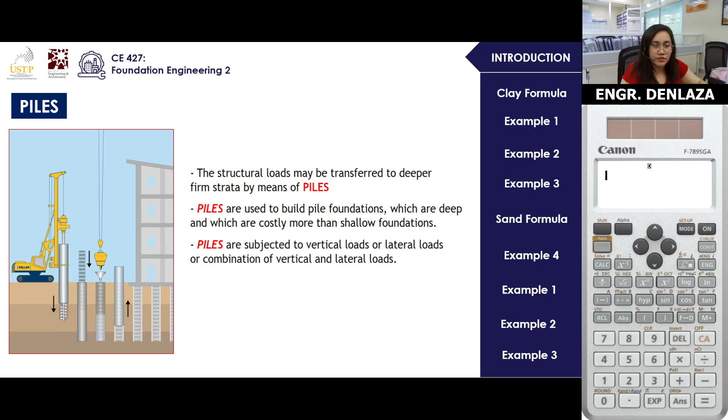Let's continue. Piles are used, piles are subjected to vertical loads, or it could be lateral loads, or a combination of these. What else?

There are different classifications of piles. Our most common, and what we've been solving in the past few months, is concrete. That's our assumption, that it's concrete. But actually, there are several types of piles. Aside from concrete, you also have steel, timber, H-flange or I-flange, then precast, and then composite.

Composite is the composition of concrete as well as the I-flange or H-flange. But realistically, timber is no longer applicable, it just goes straight into the ground. As for the I-flange or H-flange, it's somewhat costly, it's not economical, as well as the steel pipe. But who knows.

Here are the importance of piles. When one or more upper soil layers are highly compressible, meaning it's clay, and too weak to support the load transmitted by the superstructure, meaning buildings, etc. Piles are used to transmit the load to underlying bedrock or stronger soil layer. This means that if you have this natural ground line, NGL, and then you have a huge building, typically the piles go down through each layer.

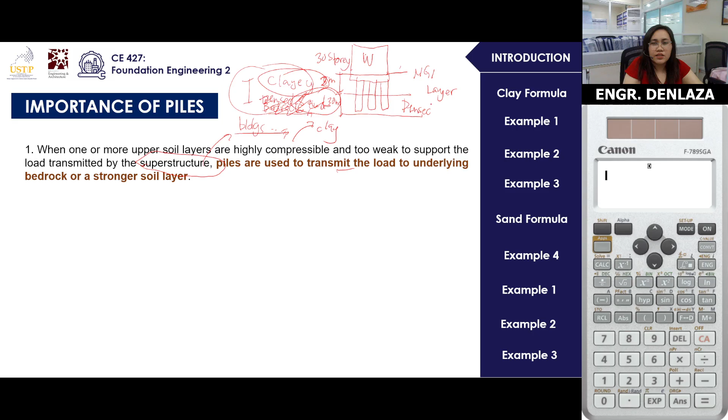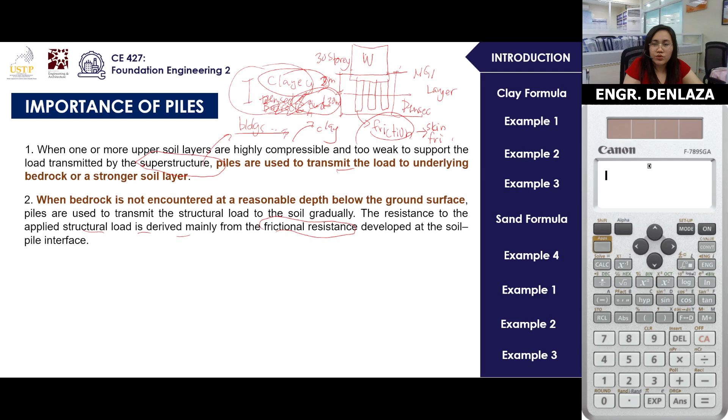So this friction that I'm talking about is called skin friction, in this case.

When subjected to horizontal load, pile foundations resist by bending while still supporting the vertical load transmitted by the superstructure. This type of situation is generally encountered in the design and construction of earth-retaining structures and foundations of tall structures that are subjected to high winds or to earthquake forces.

So it depends, it may be a lateral load. For example of lateral loads, we have earthquake load, and we also have wind load. So piles help counter or manage these types of loads, not just the gravity loads that we know. There are examples of gravity loads like dead load and live load - these are called gravity loads. And these two are some of the few examples of lateral loads.

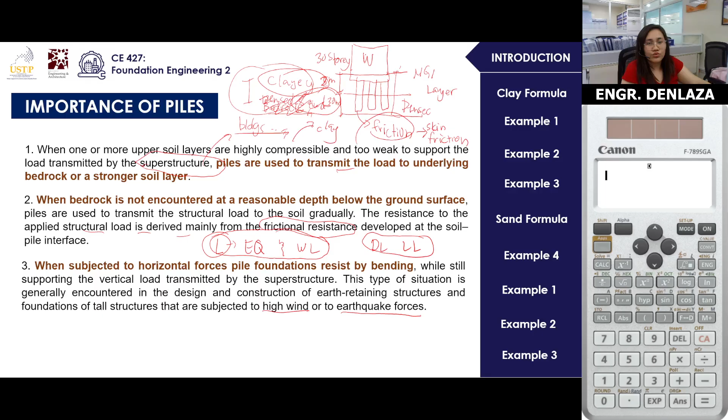In many cases, expansive and collapsible soils may be present at the site of a proposed structure. This soil may extend to a great depth below the ground surface. Expansive soils swell and shrink as their moisture content increases.

So that means to say that, of course, there is water. So what's the effect of water to soil? Of course, it will shrink, it will settle.

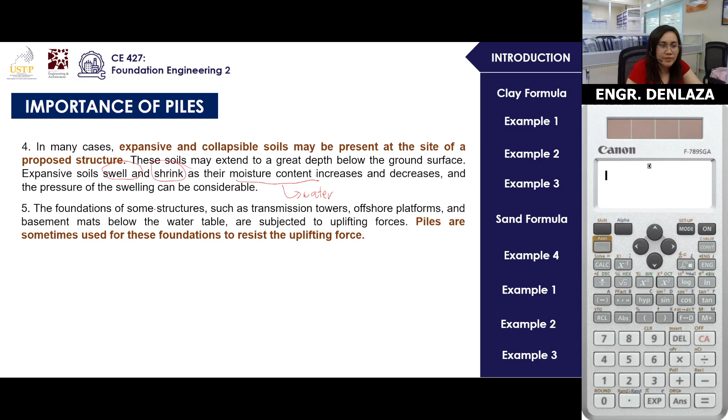Foundations of some structures such as transmission towers, offshore platforms, and basement mats below the water table are subjected to uplifting forces, and piles are sometimes used for this foundation to resist the uplifting force. Okay, that's it.

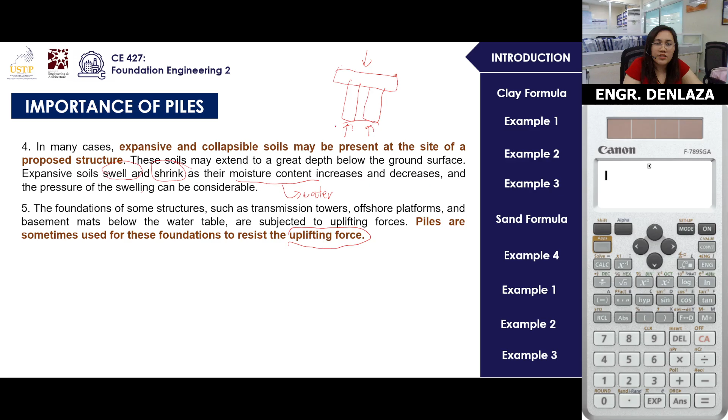Then pile becomes footing. So technically, if you are exerting a huge load downward, to stabilize it, something must counter that. And these forces that counter it are called uplift force. So depending on the question, sometimes uplift force is what's being asked.

Bridge abutments and piers are usually constructed over pile foundations to avoid loss of bearing capacity that a shallow foundation might suffer because of soil erosion at the ground surface.

So typically for a bridge, when you construct a bridge, especially when designing, you are not only designing the bridge itself - there's the girder, the slab, and the pavement. But typically there's a support here, and these supports are what you call abutments and piers, along with wing walls.

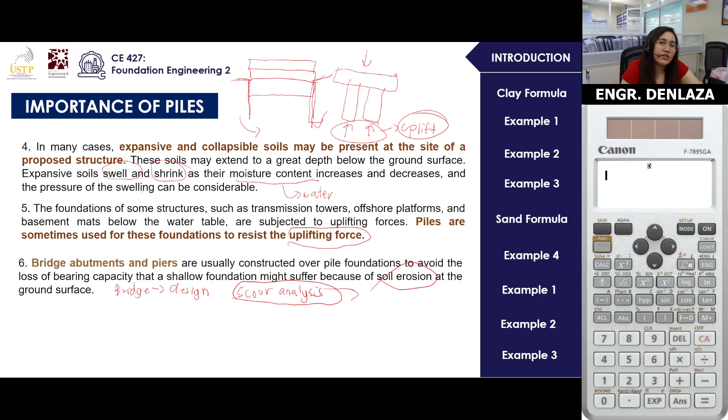And these supports alone are analyzed through what's called scour analysis. In scour analysis, you look at the long-term effect or what would happen in the later years in terms of soil erosion and other factors, especially regarding water. So along the years, it's analyzed not just for the design of the structural member itself, but also for the long-term effects.

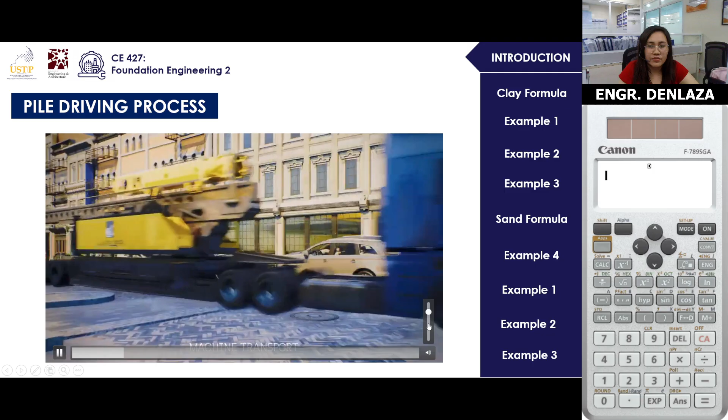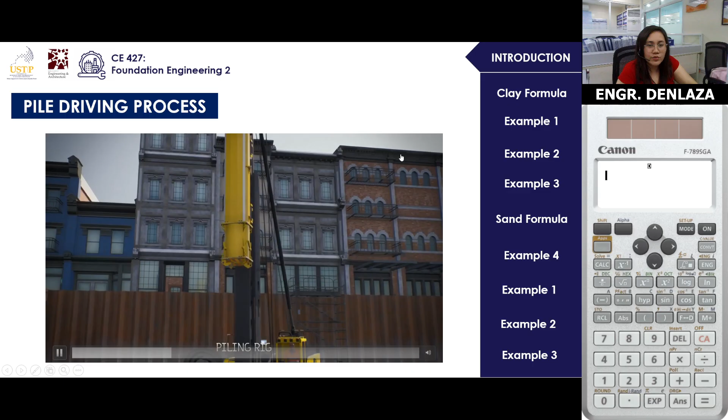That's called a pile driver. During my OJT, I was able to experience pile driving. I experienced pile driving, and I think it was a bridge project, so that's why piles were used there.

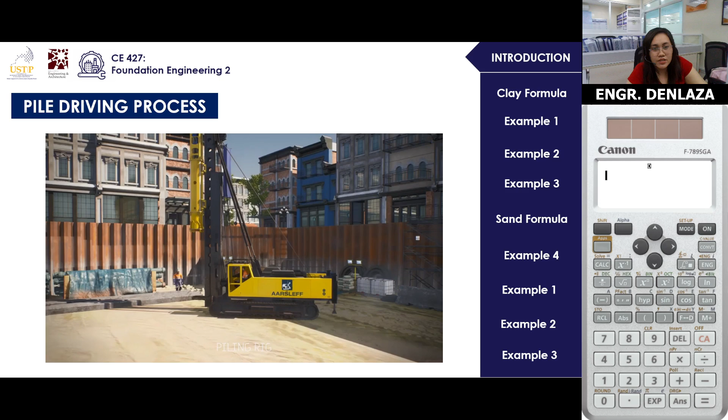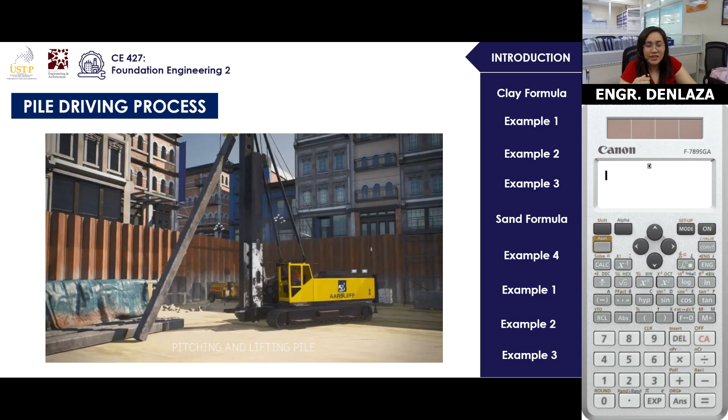So that's pile driving. Actually in your board exam, piles are not just taken lightly - don't be confused about where the pile driver's hook is placed.

Instead of using traditional rebar, the reinforcement used in piles is called tendons. Tendons are actually steel rebars, but in the sense that they are twisted, like spaghetti that's been twisted like paper, and turned. That's the shape, and tendons are used in piles for pre-stressing.

What is the purpose of pre-stressing, ma'am? The purpose of pre-stressed concrete, if this is your pile, this has reinforcements, and those reinforcements are called tendons. If you place it like that, the purpose of pre-stressing is to give it an expectancy for cambering.

What does cambering mean, ma'am? So in a structure, let me draw it again. We expect that there will be a downward force when we apply a load there. Of course, as a flexural member, what will happen? Of course it will go downward, right? It will go like that.

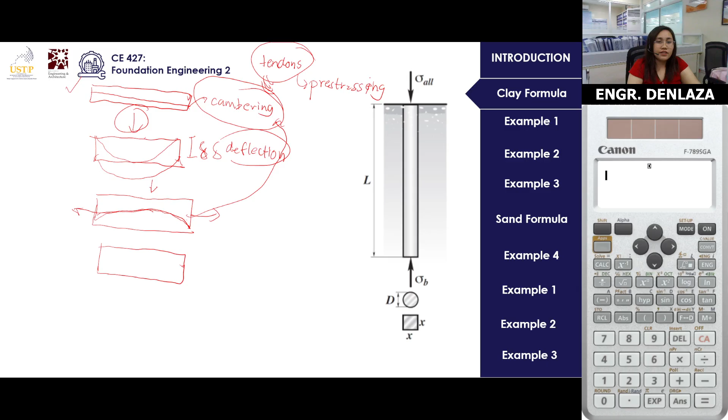I hope you appreciate the purpose of pre-stressed piles, because you will definitely encounter that, probably some of you will encounter that in your OJT. Okay? So, welcome to Piles on Clay.

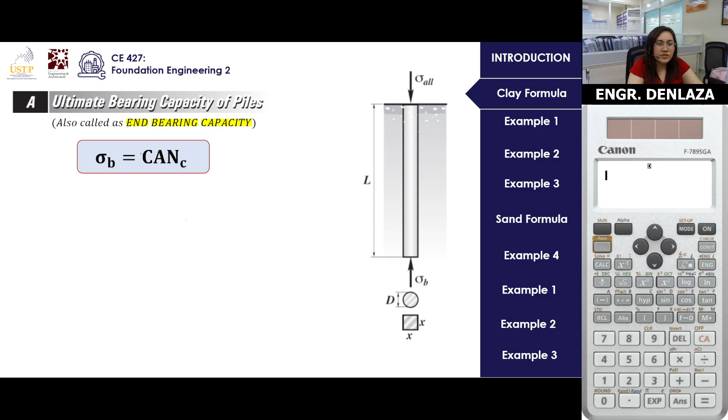So I'm talking now about piles on clay. Ultimate bearing capacity of piles could also be called end bearing capacity, and it has this formula: stress B is equal to C, which is cohesion, times area, times NC. NC is the bearing capacity factor. I'll just call it QB, in case I'm wrong, but QB, it's easier. Stress B, same thing.

So QB, and then cohesion. Cohesion, of course, you know that it's one half of your unconfined compressive strength. You know that already. Then area is the cross-sectional area of the pile tip. So if your pile is circular, what's the area of a circle? Then if your pile is square, just use the formula for square area.

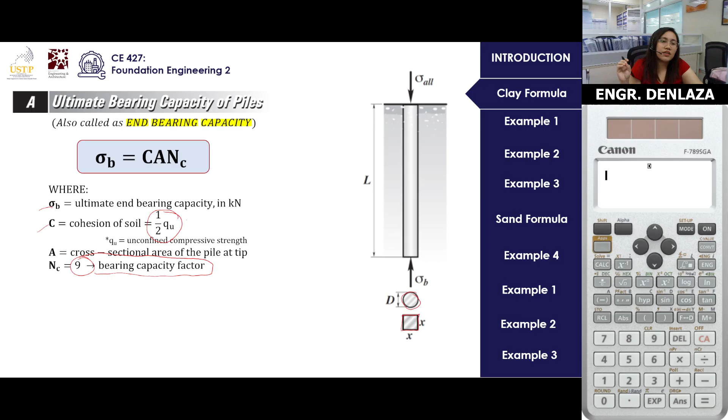Then NC is the bearing capacity factor. By the way, if it's not given, automatically use 9. The explanation for this is the assumption used and empirical tests, after several tests, 9 came out as the conclusion, to be safe. Okay?

Next formula is the ultimate frictional capacity. As mentioned earlier, piles in sand are called friction piles. This is also called skin friction, and it has the mnemonic CLAP: cohesion, length of pile, adhesion factor (alpha), and perimeter.

So what are these variables? Cohesion is still cohesion, this is alpha, actually there's also a beta, but I didn't introduce that because it's not commonly used outside the board exam. So C is still cohesion, L is the length of the pile, and alpha is your adhesion factor or frictional constant, and P is perimeter.

Going back, you might get confused about area versus perimeter. Area is different from perimeter. For a circle, what's the area? Pi, in terms of diameter, that's pi over 4 d squared. Perimeter of a circle is pi d. Area of a square is just x squared, and perimeter of a square is 4x. So you might get confused between area and perimeter.

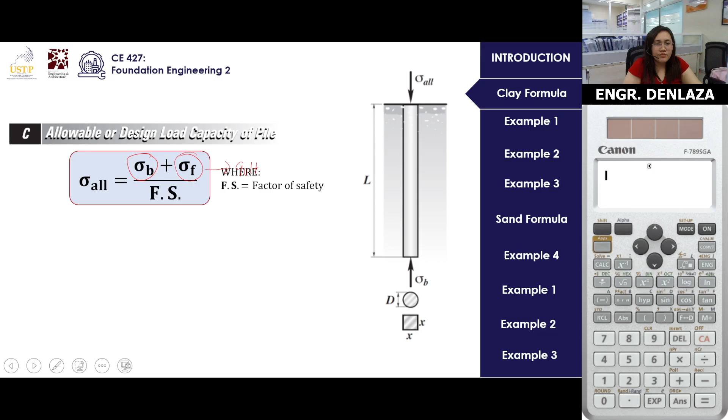Okay, now let's go to example number 1. This formula is easy to remember. The bearing formula is CANC, and the frictional one is CLAP. The ultimate, then allowable, is just QB plus QF over Fs. Now let's evaluate the resisting capacity against axial load in kN due to skin friction.

So what is the skin friction, QF, of a round wooden pile? This is a circular pile embedded into a layer of plastic clay given the following conditions. You need to determine if it's circular or not based on the given size, unless it's specifically asked about. The size of the pile is 0.35 m average diameter.

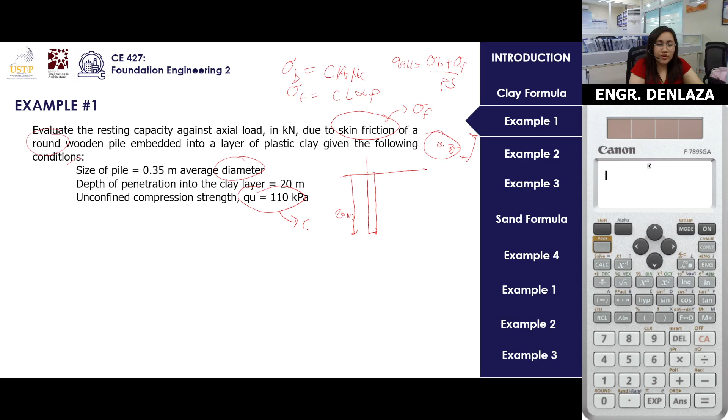So the diameter means it's circular, that's 0.35. The depth of penetration - if this is the soil, it's embedded 20 m into it. And the unconfined compression strength is QU. We don't directly get the cohesion value; you know that cohesion is half of the unconfined compression strength. So just divide by 2, you get 55.

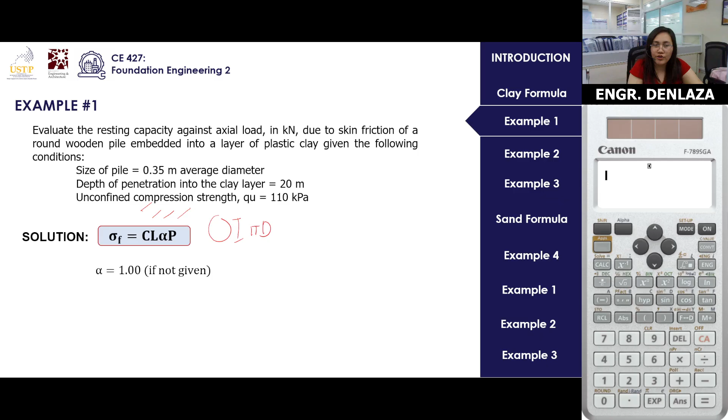Solution: So that's the equation, CLAP - this is the cohesion, the length, the adhesion factor or skin resistance factor, and the perimeter. Perimeter of a circle is pi d. If the adhesion factor is not given, it's always assumed as 1. So if you don't see a value for the adhesion factor, just use 1.

So this is d, 0.35 is the diameter of your pile. Cohesion is half of 110, so that's 55. And the length is stated here, it's 20 m. Plug it in: 55 for C, L is 20 meters, adhesion factor is 1, and P perimeter is pi times 0.35, and you will get 1209.51 kilonewton. Okay, so that's simple.

Example number 2, this one's even easier. What is the design capacity of the square pile 0.3 by 0.3 if it has a skin friction of 660? So technically QF is given, which is 660. Take note of that. The pile size is square, 0.3 by 0.3. It has a cohesion of 90 kPa, assume a bearing capacity factor NC, and a factor of safety of 2. What's being asked is the design capacity.

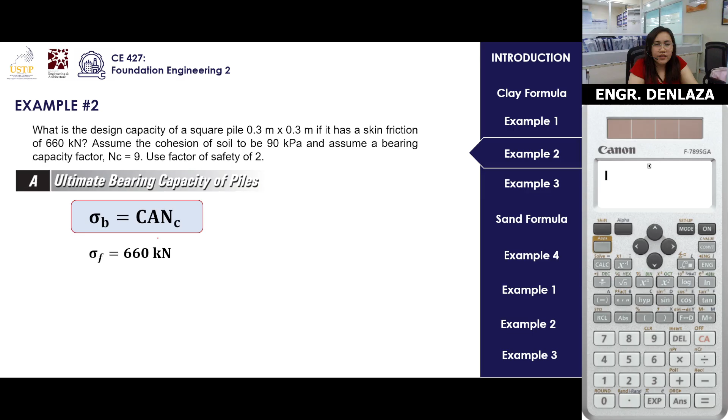So that's probably Q allowable, the ultimate bearing capacity of piles, right? You know it's CANC formula, and you have the given 660 as your skin frictional value. Allowable design load is the sum of your bearing and frictional capacity. After that, you know the collective term for that is ultimate, and dividing that by the factor of safety gives you the design capacity.

So QB equals CANC: cohesion is 90, area of a square is 0.3 squared, and NC is simply 9 since it's given - but if it's not given, just use 9. That gives 72.9 kN. Now since you have QB and QF, and the factor of safety given, 72.9 plus 660 all over 2 gives you 366.45.

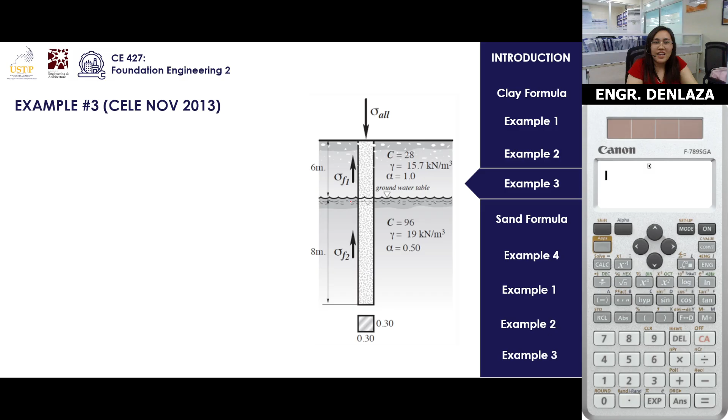A problem states there's a 0.3 square pre-stressed concrete pile. You'll notice it is embedded in a soil where there's a water table. The depth from the ground surface to the water table is 6 m, and afterward there's another 8 m, giving a total penetration of 14 m.

What is the total skin friction? That's QF. And then total end bearing, that's QB. And then design capacity is QF plus QB over FS.

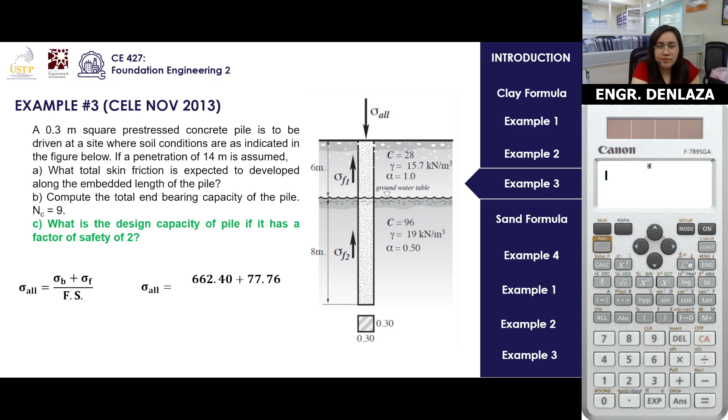After that, the last question is: what is the design capacity of the pile? If it has a factor of safety of 2, you just add what you got earlier. So that's 662.40 plus 77.76. You will be getting 370.08.

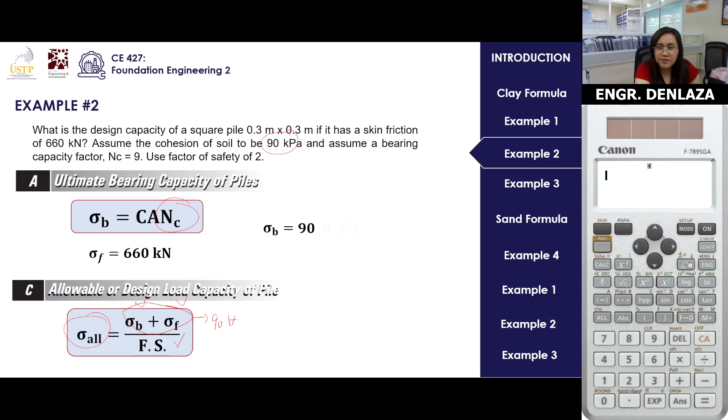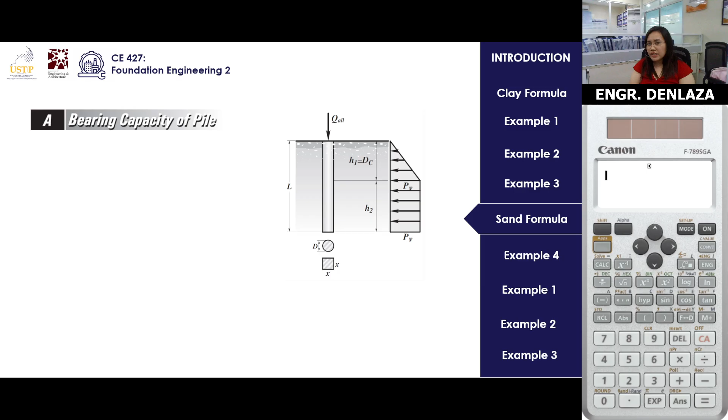Bearing capacity of pile. So this is the pressure diagram. The concept about sand is that there is a presence at your height 1, which is called the DC or the critical distance.

The critical distance will be calculated depending on the type of sand being assessed. It could be loose sand or dense sand, so the multiplier is different depending on the case. After getting the critical distance, you will get the pressure, that's PV, the pressure diagram, and it is just gamma H, so PV equals gamma DC.

So you know pressure is just gamma times height, because DC or the critical distance is still a height or a distance. If you notice, the entire pressure diagram for our pile, especially when analyzing piles on sand, is trapezoidal.

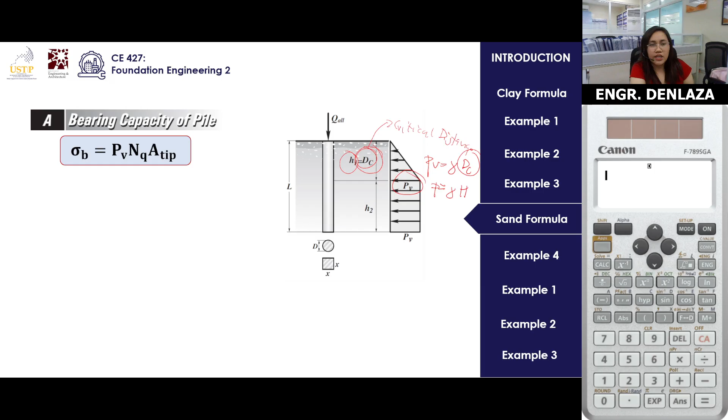It has this bearing capacity formula: QB equals PV NQ area at the tip. PV is the pressure diagram, QB is the ultimate bearing capacity, and pressure equals gamma H, where in this case that's the critical distance DC, or critical depth - it doesn't matter which term. NQ is the soil bearing capacity factor, A tip is the cross-sectional area at the tip, and DC is the critical depth.

Important conditions for DC: if it's dense compact sand, you use this equation - your DC is obtained by multiplying 20 times the diameter of your pile. So if the diameter is 0.3, that's 20 times 0.3 for dense compact sand. But if it's the opposite, loose sand, then DC equals 10 times the diameter of the pile. So the only difference between the two is the multiplier.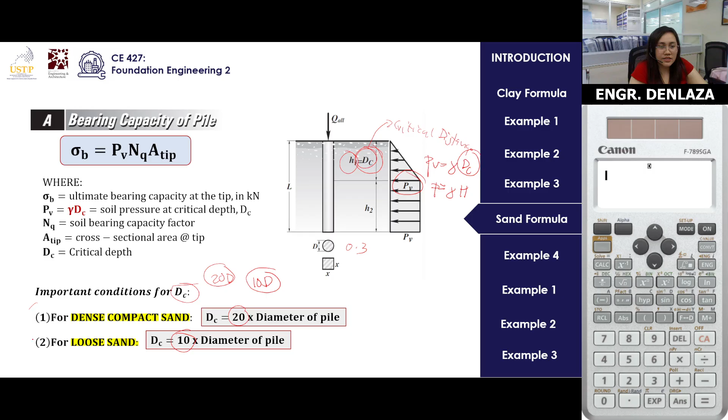So ma'am, where do 20D and 10D come from? These are results of empirical research - long laboratory research that determined how to get the critical depth for dense and loose sand, which is 20D and 10D respectively.

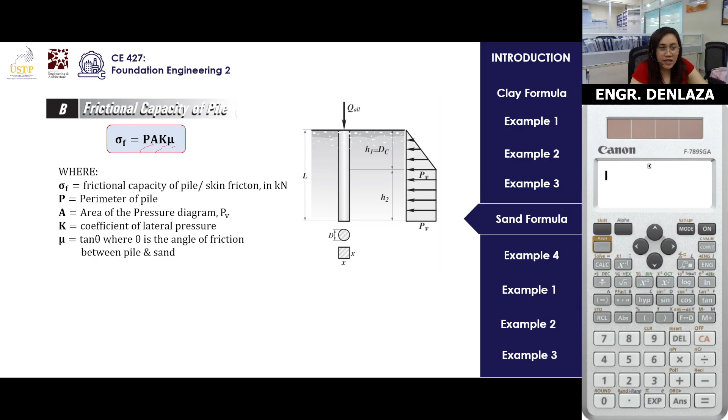Now let's derive the equation for frictional capacity of pile. There's a mnemonic for this: PAK mu. That's Perimeter, Area, K constant, and mu. So QF is the frictional capacity, P is the perimeter, Area is the area of your pressure diagram - if it's a trapezoid, use the area of a trapezoid. K is the coefficient of lateral pressure, and mu can be obtained using the equation tan theta, wherein theta is the angle of friction between pile and sand.

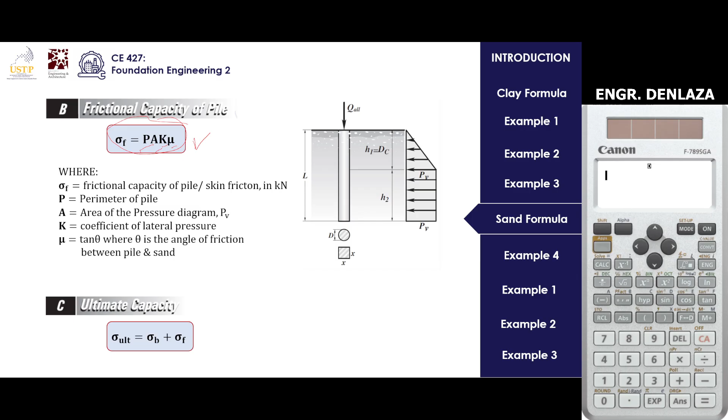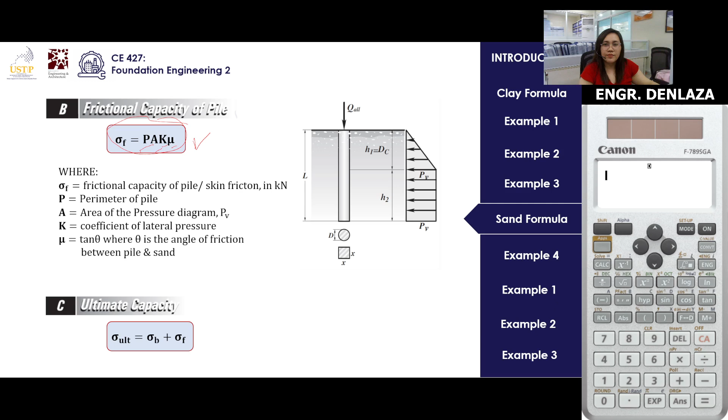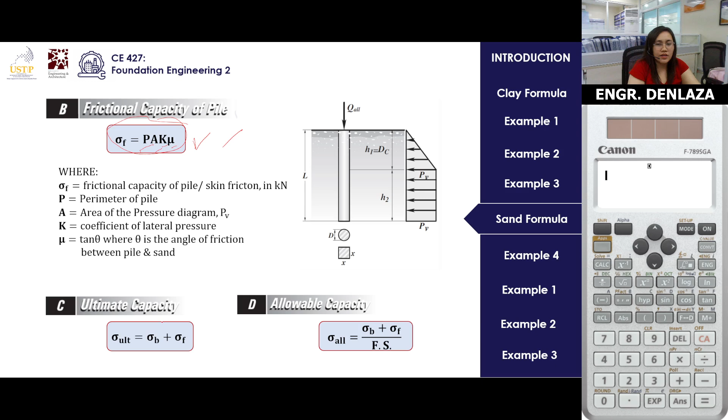Okay, so going back - that's the frictional capacity of piles, PA, K, and mu. And ultimate capacity is simply QB plus QF - that's the collective term for the sum of the bearing and frictional capacity, it's ultimate. And allowable capacity is just Q ultimate divided by the factor of safety.

Example number 4. I want to stop sharing because there's lag, my monitor and OBS are very laggy. I hope it's better now.

For example number 4: a concrete pile having a diameter of 0.3 is being driven into a loose sand - that's 10D - having a unit weight of 20, and length of embedment of pile is 12 meters. Capacity factor NQ. Calculate the ultimate capacity, which is simply QB plus QF. Simple lang.

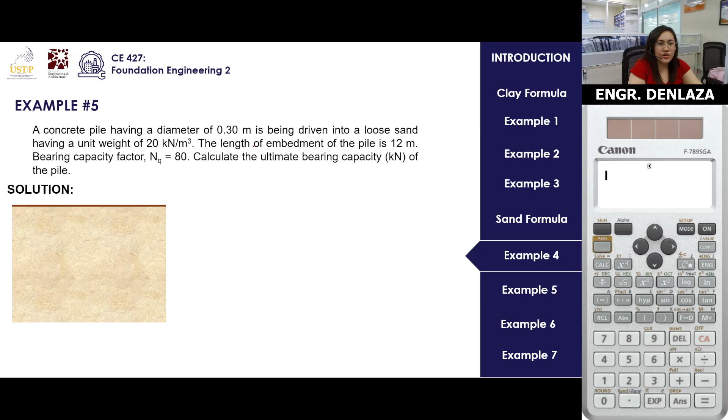Solution: so if this is your soil profile, and you have your pile embedded 12 meters - so that's 12 meters - and since it's a circular pile, it has a diameter of 0.3.

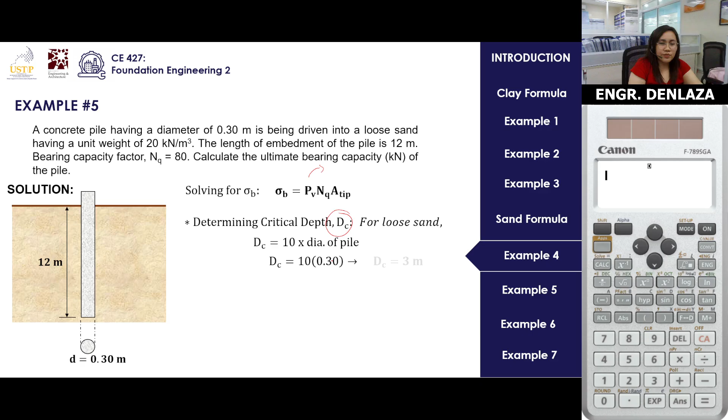Now solving for the bearing capacity, that's PV NQ A tip. PV can be calculated by first getting DC. For loose sand, DC is 10 times the diameter of pile, so that's 10 times 0.3, which is 3 meters. So the pressure diagram would look like this, and your critical depth is 3 meters. So if it's 12 minus 3, that's 9 meters - so the remaining distance should be 9 meters.

Okay, so QB - what is it? PV is Y times DC, right? YDC, DC - that's the PV, pressure V. So Y is 20, that's the unit weight, times 10... times 3, which is the critical depth, times 80, which is the NQ. And then area of the tip, since it's a circle, that's pi over 4 times 0.3 squared. And you will be getting a...

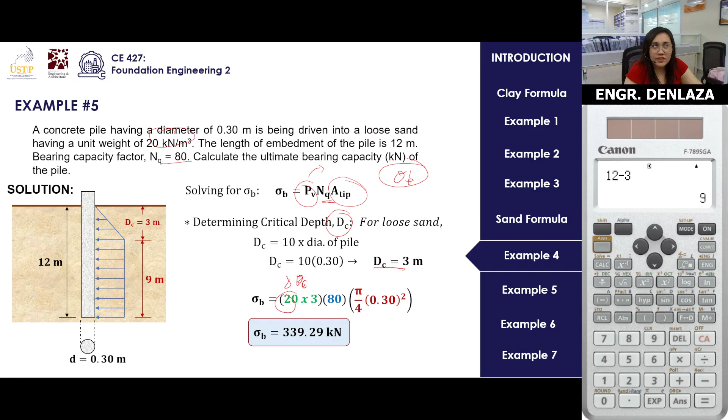bearing capacity here, not ultimate - sorry, I got confused, it's supposed to be QB, not the ultimate capacity, it's just the bearing capacity word. So that's 339.29. Example number 5 na, mahuma na din to.

Is this from lecture 11 or 12? So a concrete pile having a diameter of 0.4 is to be driven into a dense sand - that's 20D - having a unit weight of 18, length of embedment is 12, and coefficient of friction, that's mu.

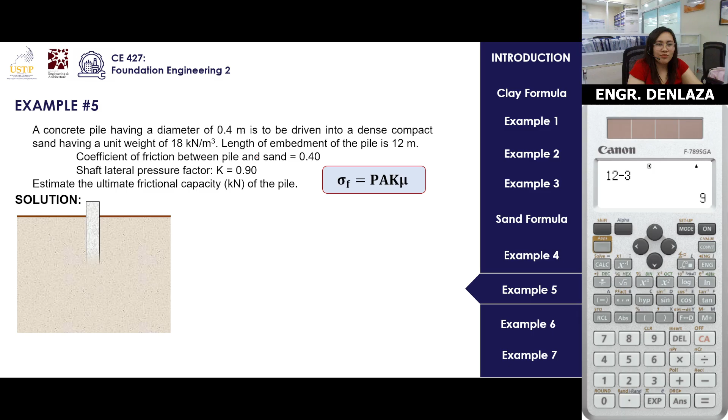Let's see - so that's 0.4 now, earlier it was 0.3, now it's 0.4. So 20 times 0.4, that's 8 meters. So this pile's pressure diagram has a critical depth of 8 meters. If that's 8 meters, then the remaining is 4 meters.

So determining the area of the pressure diagram - remember that the area of pressure diagram can be obtained by getting the PV, so that's YDC.

That's 18 times 8, and that's 144. As you can see, 18 is the unit weight, and 8 is the critical depth. Now take note, in getting the area of your pressure diagram, you need PV, and that's 144 kPa. That's the pressure.

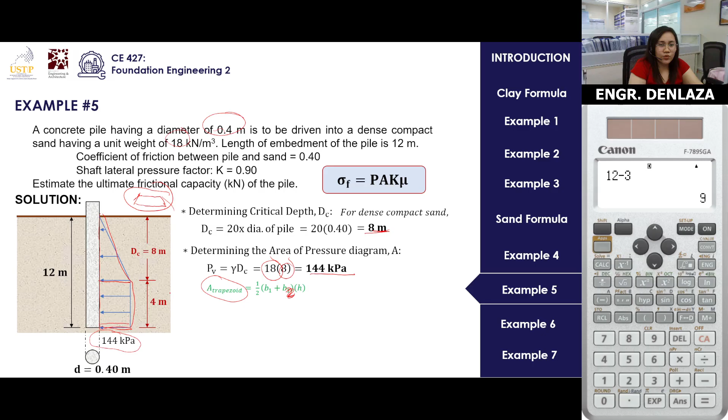So take note, that's 1/2, 12. So let's say base 1, base 2 is here, 4m, and then the height is 144, viewed from this perspective. So we have 12, 4, 144, using 1/2 base times height, or 1/2 (base 1 plus base 2) times height. So what is the area?

1152 kN per meter. Calculating the frictional capacity, that's pi D times A.

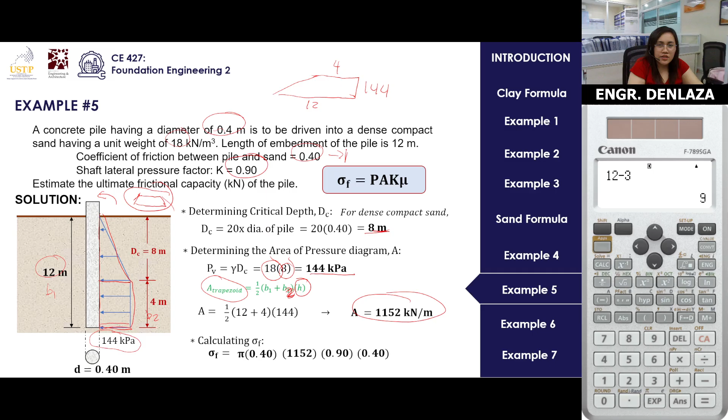That's K, which in this case is 0.9, and the mu is 0.4. That's mu. So the frictional capacity is 521.15.

Example, last example for this lecture. Example number 6. A concrete pile having a diameter of 0.3 is to be driven into a loose sand, that's 10D, having a unit weight of 20, length of embedment is 12, and coefficient of friction between pile and sand is 0.40. Bearing is NQ, shaft lateral pressure is K 0.9, and allowable load of the pile is 170. Calculate the ultimate bearing capacity, skin friction, and factor of safety. So, solution.

First, identify the critical depth. Since it's loose sand, that's 10D, so that's 10 times 0.3, which is 3 meters.

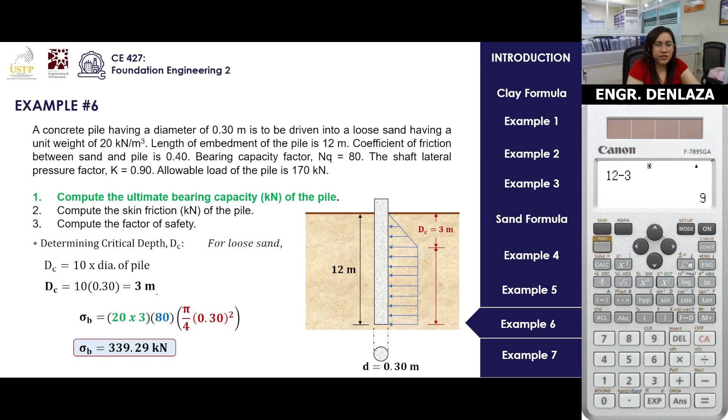Bearing capacity would now be 20 times 3 times 80, times pi over 4, times 0.3 squared, and QB is equal to 339.29 kilonewtons. That's the figure. That's 12m. Then the pressure, 0.3. Critical depth is 3 meters. And then that's 9.

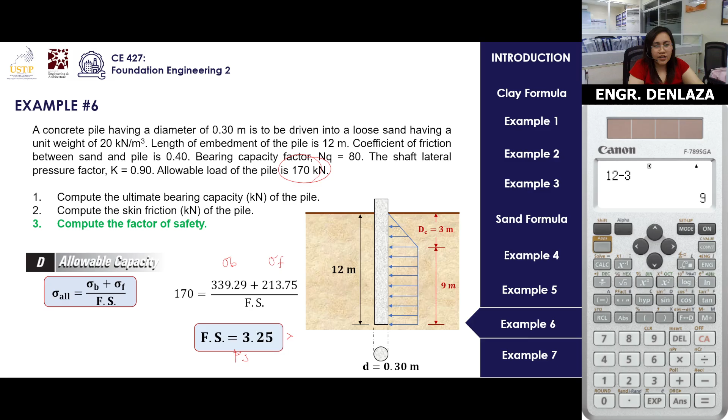Factor of safety: given that's 170 allowable, and 339.29 as bearing, plus the frictional. So factor of safety, using shift-solve, is 3.25. As long as factor of safety is greater than 1, that means it's stable.

And last example: a precast concrete pile 16 m long has a diameter of 400 mm, and the pile is driven through layers of clay and dense compact sand. So it's a combination of clay and sand layers.

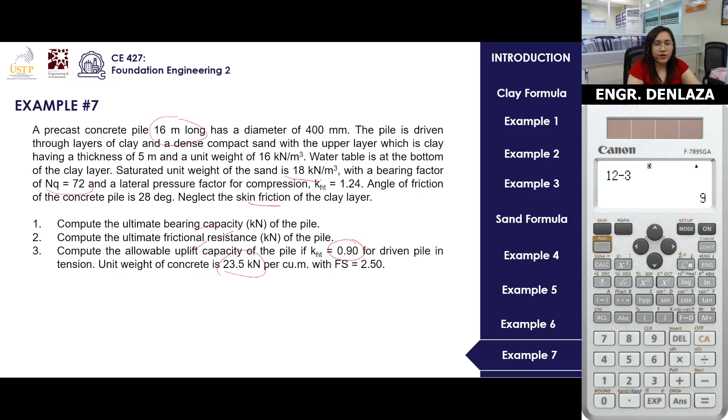The upper layer is clay with a thickness of 5 m, unit weight of 16. The water table is at the bottom of the clay layer. Saturated unit weight of the sand is 18, with a bearing capacity factor NQ of 72, and lateral pressure factor KHT1 equal to 1.24, and angle of friction of the concrete pile is 28 degrees. Neglect the skin friction of the clay layer. Calculate the ultimate bearing capacity of the pile, ultimate frictional resistance, and the uplift capacity, given that KHT is 0.9, unit weight of concrete is 23.5, and factor of safety is 2.5.

So the diagram looks like this, if we draw it. The water table is from the ground, so that's 5 meters.

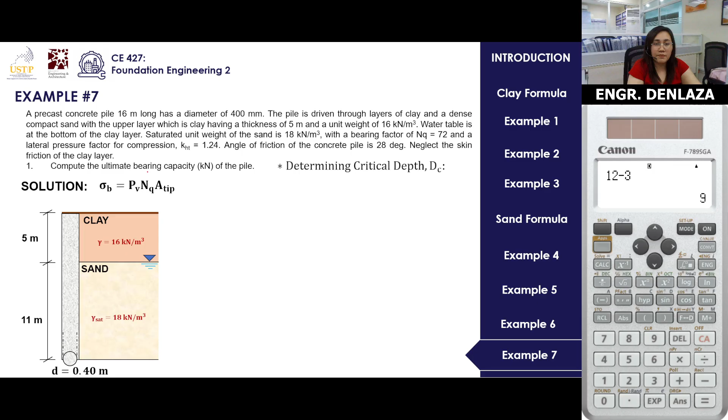Recall the equation for getting the bearing capacity, that's PV NQ A tip. Determining the critical depth, that's dense compact sand, so that's 20 times the diameter of the pile, that's 8 meters. This is 5 meters, and another portion is 8 meters. Now the remaining, 11 minus 8 meters, so that's going to be 3 meters.

Calculating for the pressure V, that's 16 times 5, vertical stress, plus 18 times 8.

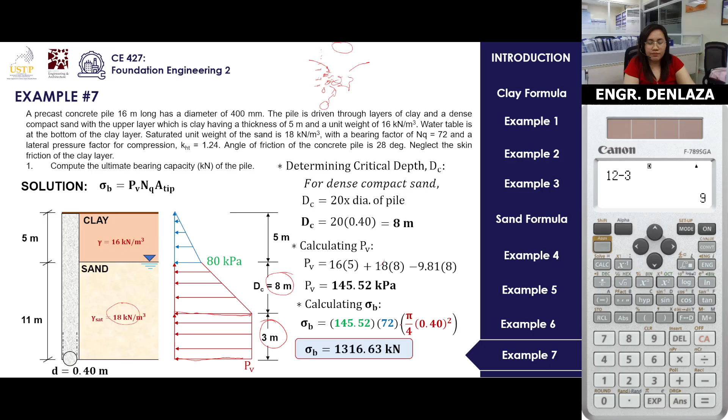So calculating for the bearing capacity, that's 145.52 times NQ of 72, then the area of the tip, that's pi over 4 times 0.4 squared, giving us a bearing capacity answer of 1316.63.

So the area of this trapezoid here is 1/2 times base 1 and base 2. I wasn't looking at it correctly - this is the trapezoid shape I was looking at. And the pressure here is the same pressure, so that's 145 here, 145 there.

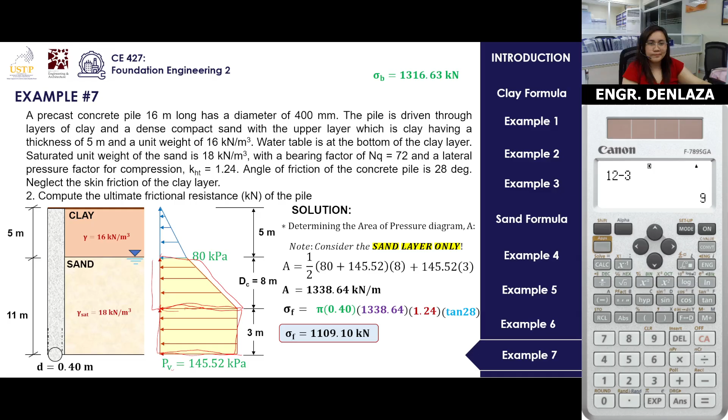And the last question: compute the allowable uplift capacity. First the illustration, so that's PAK and mu, that's pi times d times area and then k.

Let's indicate that k downward is negative, because it's the opposite direction. And take note, what's the equation for mu? That's tan theta, and the given angle is 28 degrees.

So that's negative 804.99. Calculating the weight: you have your unit weight of concrete, 23.5, times volume, because the unit weight is in kN per cubic meter, so you need the volume in cubic meters - that's the area times the length of 16 to make it a unit of volume.

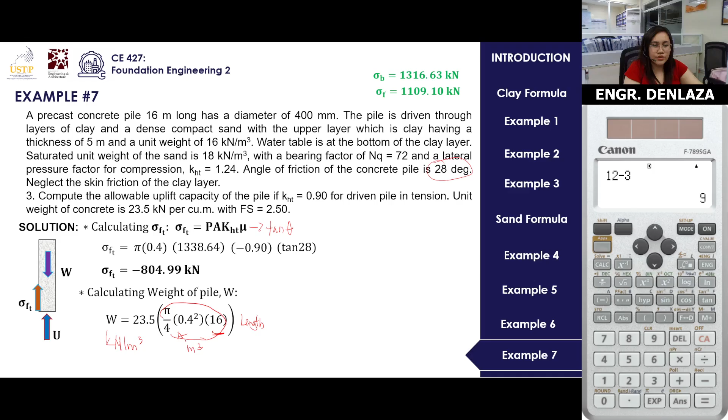So that's 47.25. Summation of forces along y - whatever the orientation, it's the same. So that's u upward plus, let's indicate it as negative here, negative 804.99, minus, which is downward, 47.25, which is the weight.

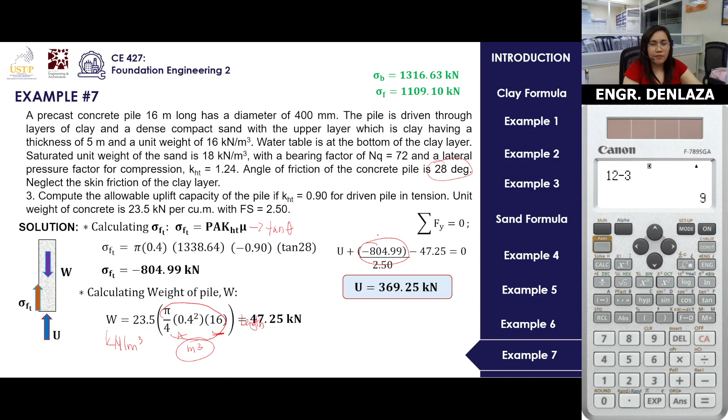And take note that your frictional capacity here should be divided by the factor of safety, so you will get an uplift pressure of 369.25.